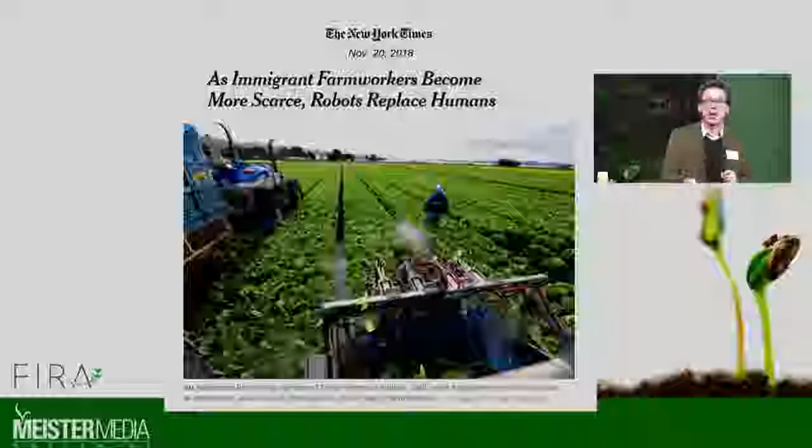Now, as you've been hearing, this is happening in the United States as well. And in fact, it's even happening in Mexico, which is where the United States has long drawn its labor from.

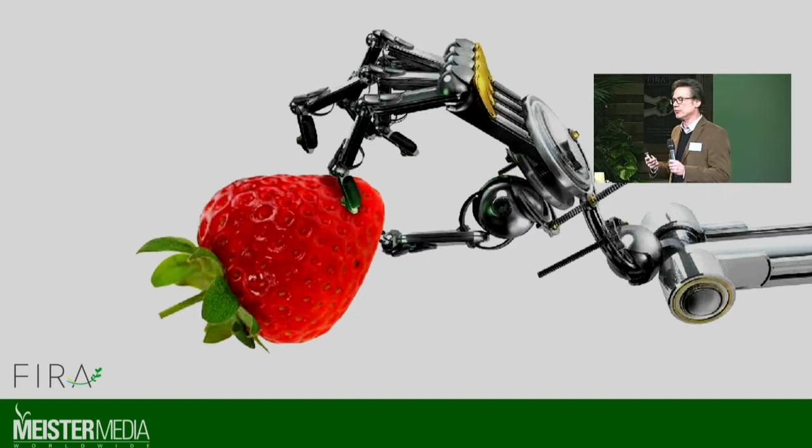I just thought it was interesting to round out my opening comments. This, I think, is the perception of robotics - just a robotic arm that's going to replace human beings. There's always been this dystopian view of robotics, when in actuality we know there's a wide range, as Mark Van Ocht was saying earlier, of sizes and types of robotics.

So it's exciting to see all these coming to fruition now in greenhouses, vineyards, and vegetable operations. It's really exciting to hear at this conference all the technology that's now actually coming to fruition. So those are just some opening comments from my perspective, from serving agriculture as I have for about 31 years at Meister Media.

And now I'd like to begin our panel discussion, which will round out this second session, called the Robotic Revolution. This is truly an international panel.

We have Dr. Noboru Noguchi from Hokkaido University in Japan. He will be followed by Salah Sukkarieh of University of Sydney in Australia, who's not able to be here - however, he will be joining us via video, and I think it's late evening now in Australia. So it's wonderful that he can join us for questions. And then we'll round out here from Bosch Deepfield Robotics in Germany, from Maurice Gohlke.

First I'd like to bring up Dr. Noboru Noguchi - he'll tell you more about himself, but as background, he's professor of agricultural robotics at Hokkaido University in Japan. He's professor and director of the Robot Vehicle Lab there. Since 1990, his laboratory has developed more than 15 agricultural robotics. Noguchi has received more than 20 academic awards from major corporations and academic institutions in Japan and internationally. Currently he's working on a multi-robotic system and the intelligent vision of machines for a mobile agricultural robot.

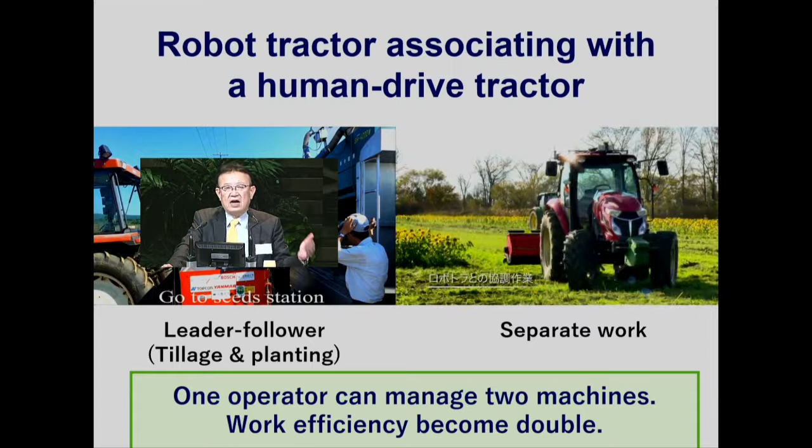The human tractor in this case is tilling, subsoiling by driving the tractor. But this one guy is also responsible for ensuring safe operation of the robot. So obviously, one operator can manage 2 machines. Work efficiency becomes double. This is the current technology using robot tractors in Japan.

Next step is, again, remote monitoring, remote control systems. The goal is to complete this by the 2020s. The goal of this system is to implement super labor-saving technologies into agricultural sectors.

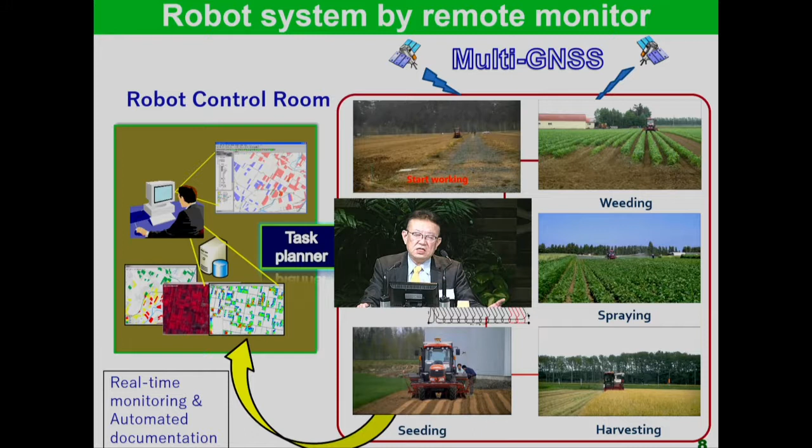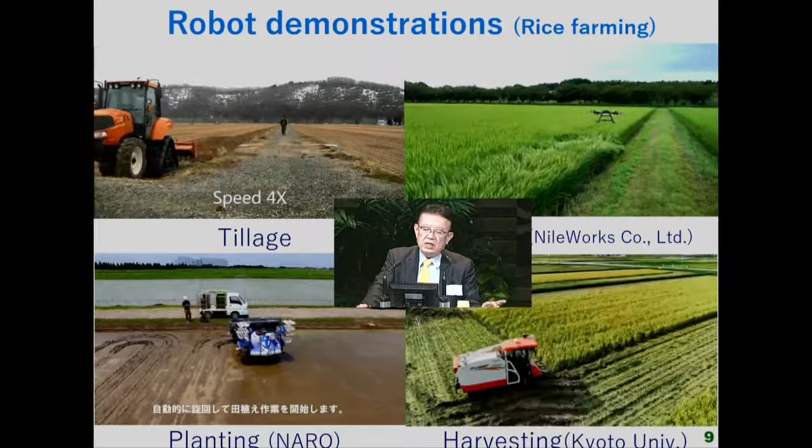So this is our achievement for agricultural robots. Here is rice plant farming: tillage, spraying using drones, planting, harvesting by combine harvesters. Planting is being developed by NARO.

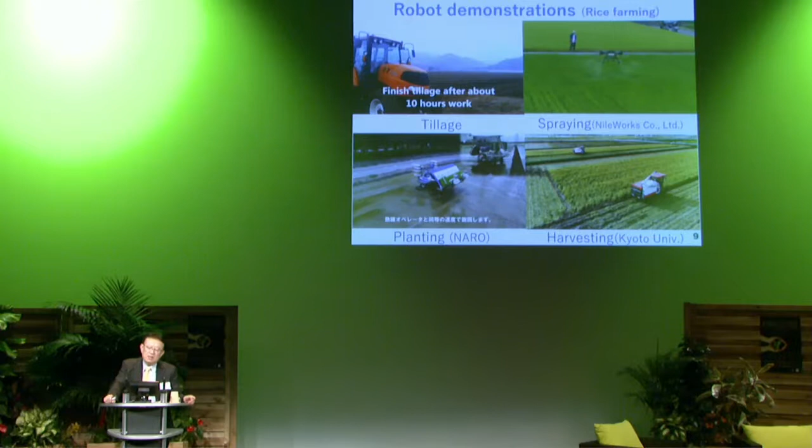This is the National Research Institute of Japan. And the harvesting robot is being developed by Kyoto University. But these are basically almost the same accuracy, less than 5 centimeter errors.

The other thing is upland farming. This is Hokkaido University's work. Fertilizing, seeding is possible, and weeding and spraying are also possible.

Okay, this is not yet available; there are no companies selling this kind of robot system for weeding, spraying, without any damage to the crops, because of the high accuracy required. Another thing is that this robot can go to the field by itself.

Therefore, it's not necessary to bring the robot tractor to the farm. The robot tractor goes to the field by itself, works there, completes it, and comes back. This is possible. But unfortunately, the current public road traffic law, which is very important in Japan,

doesn't allow us to use a robot like this. We cannot run, an unmanned tractor cannot run on the public road. This is the regulation. But the technology is available.

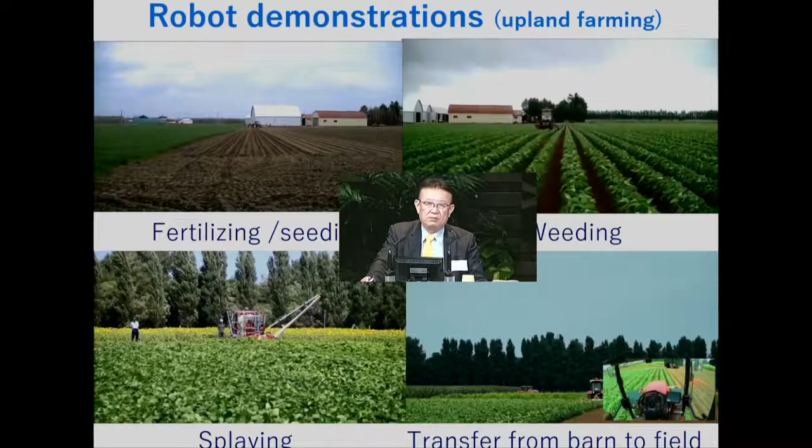But the important thing is safety. Absolutely, definitely. So many companies are now developing very good sensors, and our laboratory is also developing safe devices, safety sensors.

We are developing using omnidirectional cameras, mounted on top of the roof. We construct stereo vision on the omnidirectional cameras, which can cover 360 degrees. We are also developing laser scanners, mounted front and rear, covering 360 degrees surrounding the robot. Each laser scanner covers 270 degrees, but using 2 laser scanners, we can cover the whole area.

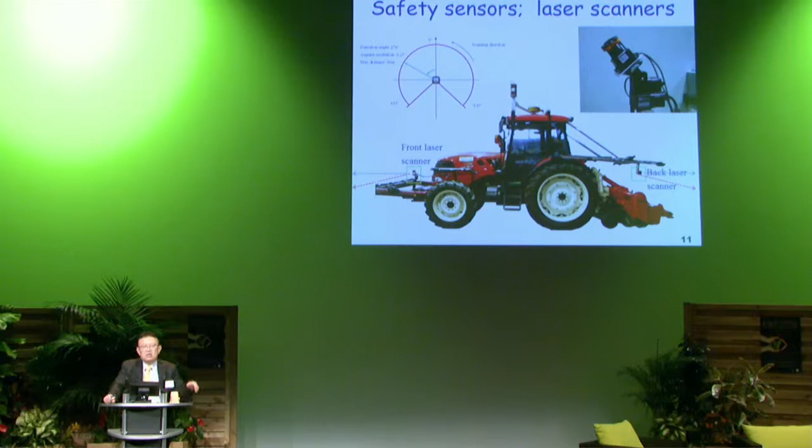We also move it back and forth to detect in 3D. So this is a demonstration, it's weeding, the robot is weeding. You can see someone get in front of the vehicle, it stops and then makes a run, even in the lateral directions, recognized by the sensors, and the rear too.

We are also shifting up and down. Therefore, small kids and small animals can be detected, but if a person is completely hidden by crops, it's very difficult, almost impossible to find them. But if you can see the human clearly, it's very easy to find out and then stop it and make an alarm.

We are now also developing remote monitoring systems. We set up 2 monitors: one is a live image around the robot, using web cameras from front, backward, right, and left, 4 cameras total. The other monitor is a GIS-based monitor.

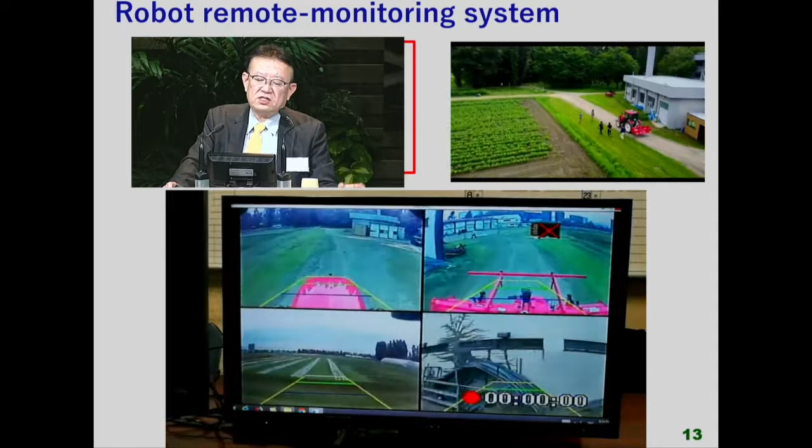So you can see the robot tractor go out from the barn to the field, and the live images are sent to the offices, where we can see the surrounding situation and the condition of the robot. The other monitor tells us the current status and where the robot is, based on the GIS.

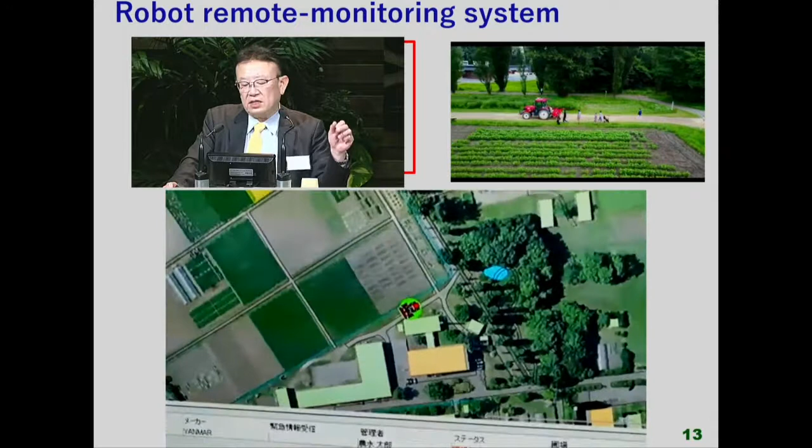If some problem happens, we can immediately stop it, and we can also restart again. So you can see the robot is moving, and we can recognize the robot working there.

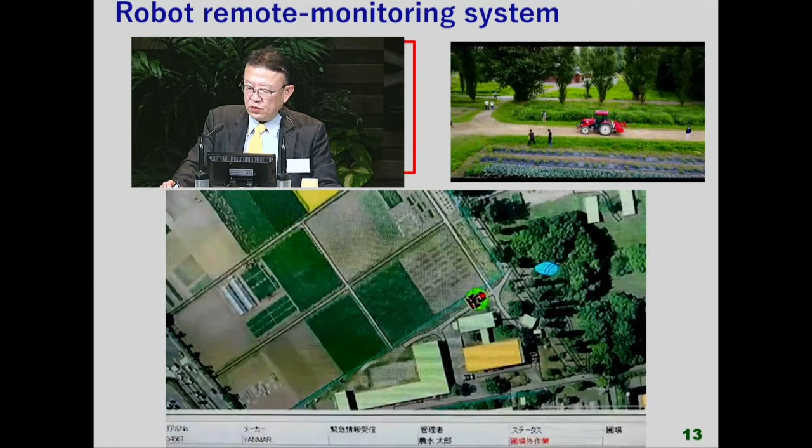Another application we are developing is multi-robot tractors. As you know, Japan is a very tiny country. In the main island, each field is very small, normally about 100 meters by 30 meters. This is a common size. Farmers use small tractors, about 50 horsepower.

I come from Hokkaido, which is a little different. Our acreage is almost the same as the German size, about 50 hectares. Therefore, farmers in Hokkaido use big tractors. But now we are thinking of a new concept of robot tractors: we want to try to use the same size of tractors, from small fields to large-scale fields.

For instance, in multi-small farmland, each field is small, and a 50 horsepower robot tractor works separately. On the other hand, in a large farm field, people usually use big tractors instead of small ones for efficiency. But we try to use small tractors with multiple robots instead.

This is comprised of small robots, and small size machines are good for both safety and soil compaction. We don't expect each farmer to have multiple small robot tractors. Our idea is that farmers borrow small robot tractors from each other, making flexible and efficient work possible. A robot tractor is available 24 hours, so sharing with each other should be possible, I believe.

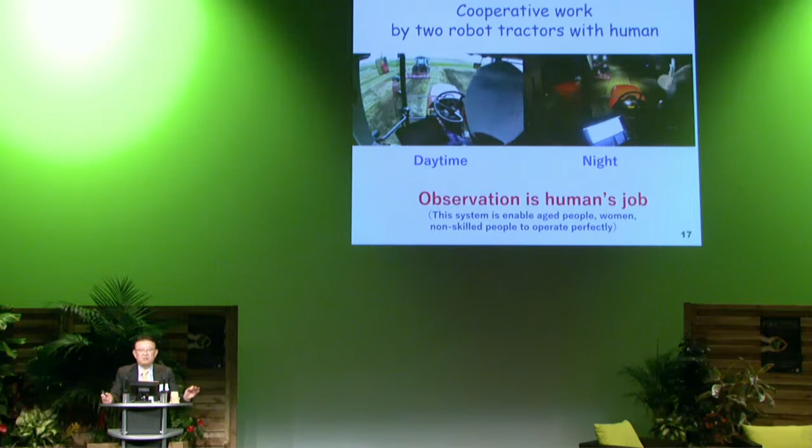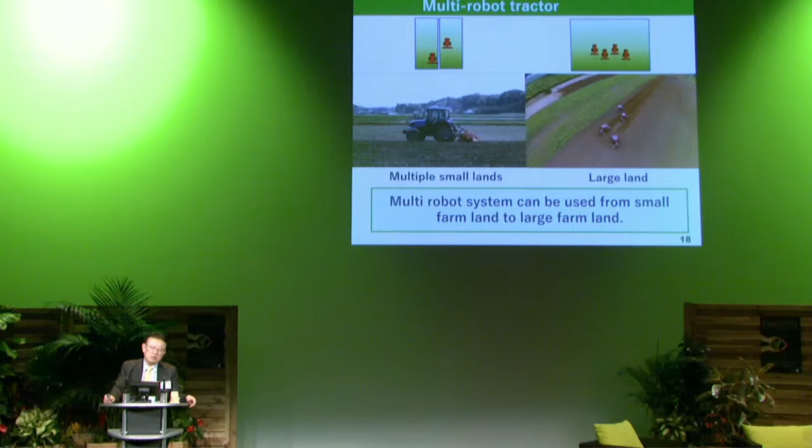We are now developing small robot tractors and multiple robot systems. You can see the left hand is multiple small lands. We tested this near Tokyo downtown in a small field. Each robot tractor works separately, individually. The other one is in Hokkaido, our field, where 4 robot tractors work together. These 2, the Honshu Island robot tractors and our robot tractors, are the same size, about 50 horsepower. But for the 4 robot multiple robot system, the total power is equivalent to 200 horsepower because 4 machines work together. Multi-robot systems can be used for small farmland to large farmland. This is the idea.

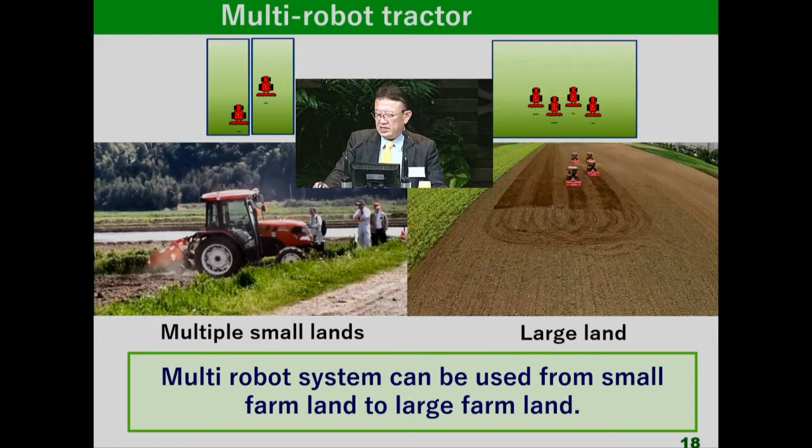So now here, you can see the robot tractor is not individual. We can communicate with each other to make safe operations. So, formation. Now, this is our Prime Minister, who introduced our technology last year.

Prime Minister Abe introduced our technology at the 14th annual meeting of the STS Forum. STS Forum is the Science and Technology in Society forum. It is always held in Kyoto city. Last year he introduced our technology. Please take a look.

Five years in a row, I have joined your annual meetings, and each time I've emerged even more optimistic about our future. I am a big believer in what science and technology can do to solve some of the structural problems we face. We must advance and benefit from science and technology. It is as simple as that.

Take, for example, agriculture. In my country, farmers are aging, and their numbers are declining. But let's look at the positive side. One good example is robotics and what it can achieve. This August, on the farm in Hokkaido, there are 4 tractors running shoulder to shoulder.

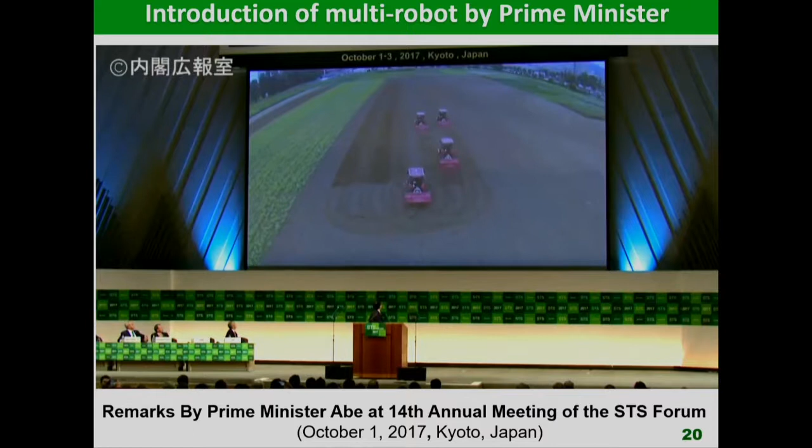So this is our robotics. 4 robots work together, communicating with each other. How about that?

Robot tractors could work rain or shine, day and night, even while the owner sleeps. And that is just one small piece of evidence that technology could make our agriculture all the more promising. You need not worry about farmers again, no more.

This is, he's a very good sales manager. But anyway, now he mentions the Japanese GPS. We are using Japanese GPS as well. We call it Michibiki, the Quasi-Zenith Satellite System.

Current GNSS cannot be used at any time, in any place in Japan, at least. Sometimes it drops to float solutions, and sometimes differential GPS solutions. That means the farmer needs to operate it by himself. Therefore, there is low reliability due to the limited number of satellite vehicles, and also acquisition of signals for RTK has problems.

QZSS, Michibiki, has been started since November 1st this year to develop satellite positioning services that can be used in a stable way in all locations at all times. This system is compatible with GPS satellites and also Galileo, and can be utilized with them in an integrated fashion. In this way, the satellite positioning services environment will be advanced dramatically. Michibiki QZSS can be used even in the Asian Oceania region with longitudes close to Japan, so its usage will be expanded to other countries in these regions as well.

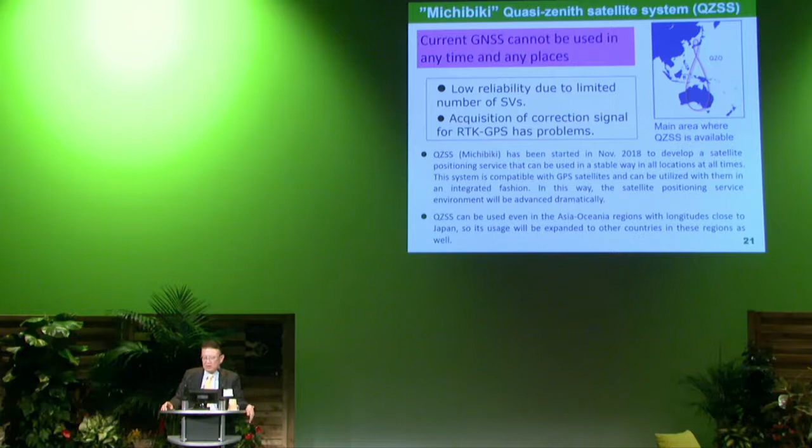You can see the map there. This is QZSS coverage of these areas. Therefore, Australia, China, Indonesia, Philippines, Malaysia, Thailand are covered. The service is available. You can see the figure 8 is the orbit of the QZSS. So now this service started this November 1st this year. This is also a good introduction into our Michibiki. Please take a look.

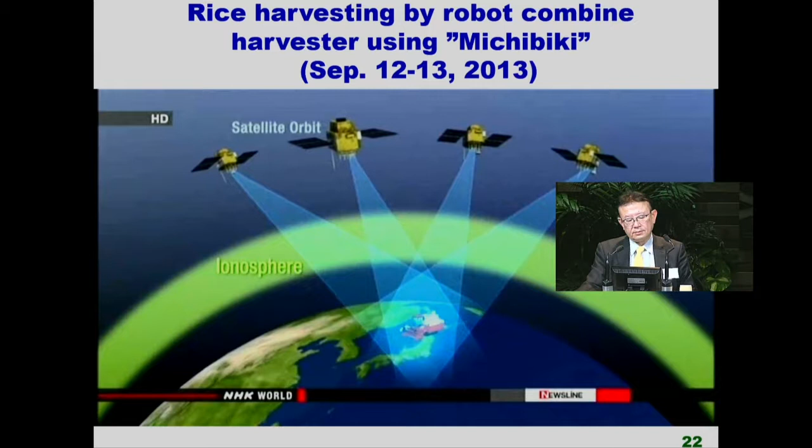Most countries rely on the Global Positioning System, or GPS. But some factors cause GPS data to lose its accuracy on its journey to ground receivers. Two of these are the shift of the satellites out of their orbits and a delay in the signal caused by the ionosphere. They can be off by as much as 10 meters. The Michibiki system sends correction data and reduces the error to centimeters.

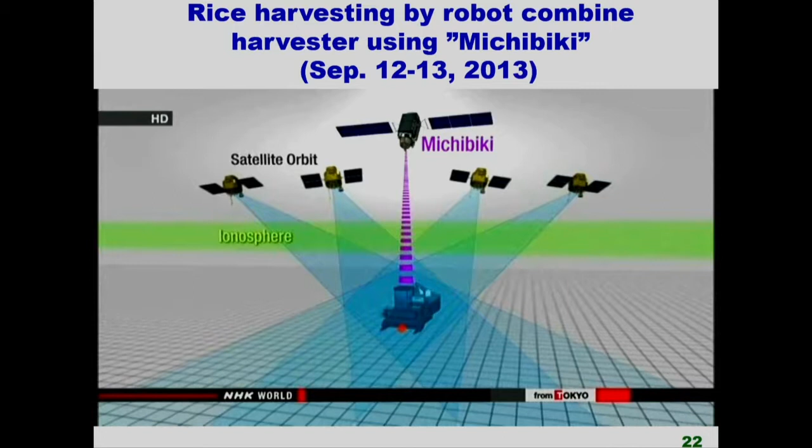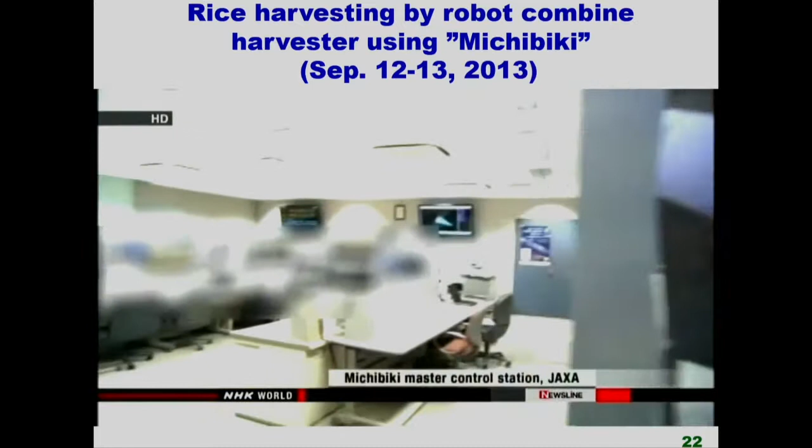The Michibiki system achieved positioning at this level of accuracy. The key was producing the most accurate correction data possible. This is the heart of the system at the Japan Aerospace Exploration Agency. Correction data is being collected and sent to the Michibiki satellite. A unique algorithm is used to calculate factors that influence GPS accuracy, and data is then produced to decrease the positioning errors.

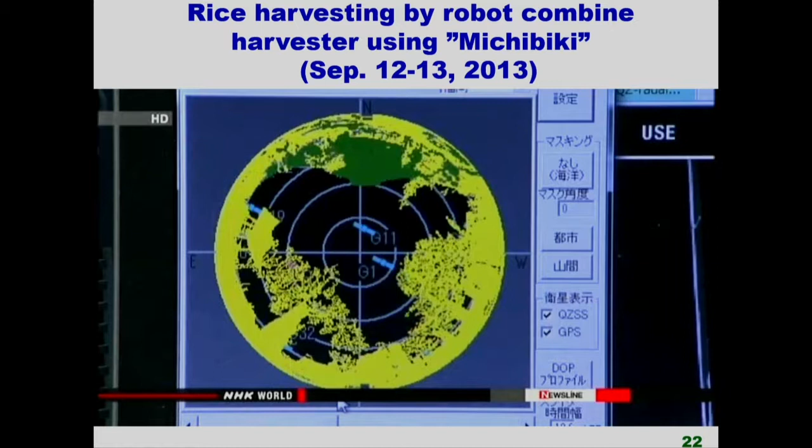Improved accuracy creates new opportunities. One example is using robots for agricultural work. A group led by Hokkaido University professor Noboru Noguchi aims to become the world's first team to completely automate farming.

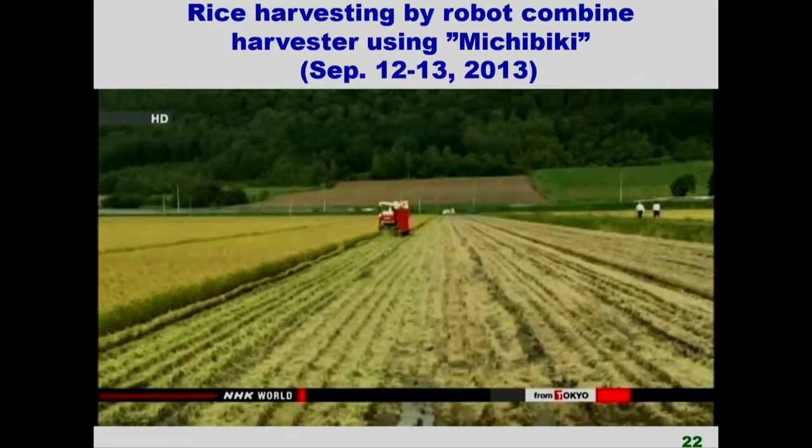GPS systems for farming are already used in places such as North America and Europe. Unlike this harvester with the Michibiki system, a driver has to be in the vehicle with the current system for safety and to turn the machine. The accuracy of the Michibiki system allows the vehicle to make turns by itself.

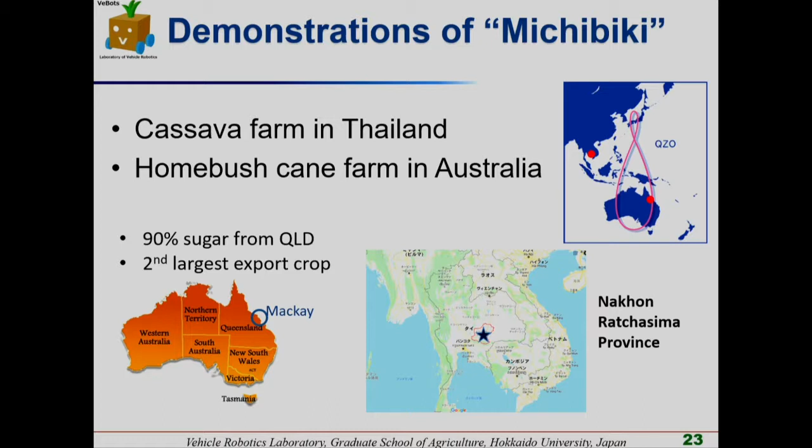This one already started in 2013. I mentioned that this year the service started, so 5 years ago we worked with the government. Therefore, we used Michibiki during their development, and we tested using robot combine harvesters with Michibiki.

But now this service is completely started, and all people can use these systems. We also did performance demonstrations with Michibiki in other countries - one in Thailand and the other in Australia, since Michibiki covers both Thailand and Australia.

Thailand also has challenges with labor shortages - for example, cassava planting. Normally two people are needed, the operator plus workers, but with no operators needed, one person can just plant the cassavas alone. No drivers - we demonstrated that in Thailand last year using Michibiki.

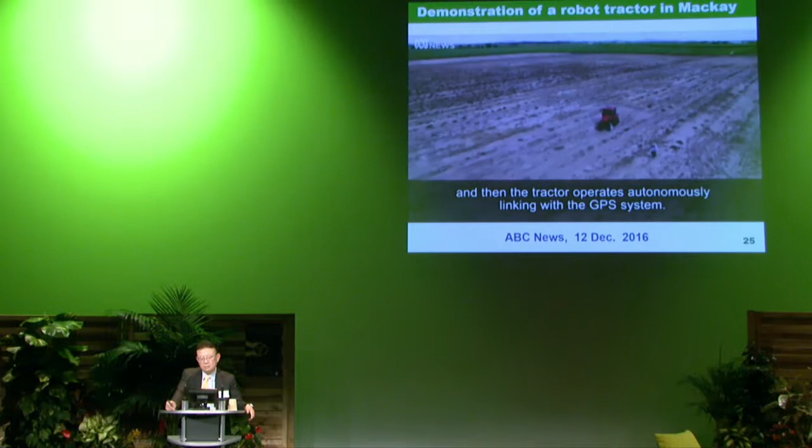The farmer could go to bed at 8 o'clock. That tractor could go round and round the field all night, come out, fuel it up the next morning, the job's done.

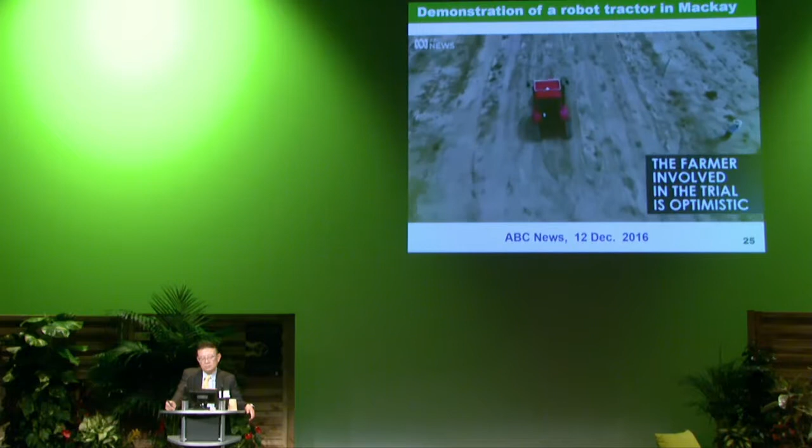If we can achieve more productivity with less stress and less people, I suppose it's going to be a good thing. So this is also something we tested 2 years ago, and Australia is also very much interested in this kind of technology.

We also tested drones, monitoring the sugarcane growth, height, and also the NDVI, which is the health of the sugarcane. We attach RGB cameras and radars underneath the drones, then fly over there and make a map. The positioning uses the Michibiki QZSS.

Harvesting heavy crop is very laborious for farmers. The harvesting robot is able to perform selective harvesting without giving any damage to the crops. Target crops are pumpkins, watermelon, cabbage, and so on.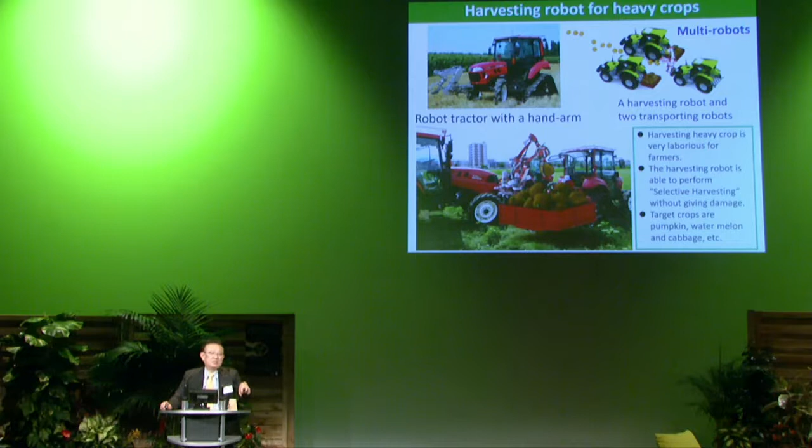Multiple robots are used, two robots. In the front there is a container, and the center robot has a hand that harvests pumpkins and loads them into the container. This is tested in the laboratories. This is our goal.

Now we are developing another robot, a smart farm robot. Actually, current technology robots can only achieve simple tasks, just running precisely, but they don't have any intelligence at all.

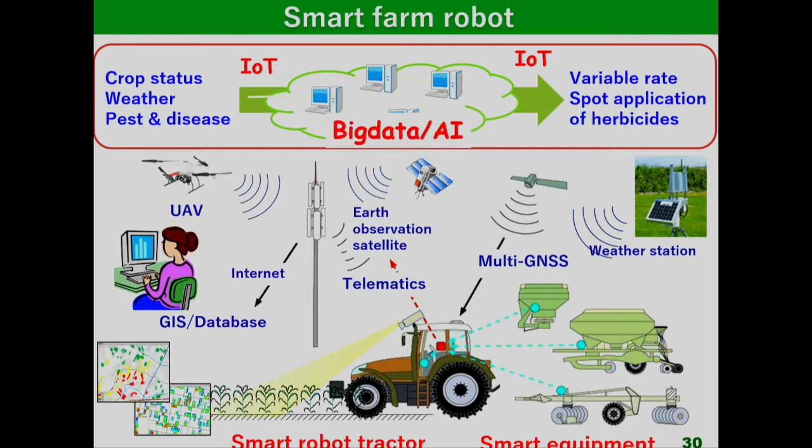Therefore, we want to add intelligence to the robot tractors, detecting disease, the affection of wet soil conditions, and also the lack of nitrogen. But putting intelligence in the robot is not a good solution, I believe, because it's very costly and the robot becomes expensive.

Therefore, now we place the intelligence outside the robot. Crop status, weather, pest diseases are detected by drones or whatever, and through IoT, uploaded to servers, where AI analyzes the data and the final result is sent to the robot. The robot follows that decision. This is the idea, so IoT, big data, and AI are key technologies for making an intelligent robot.

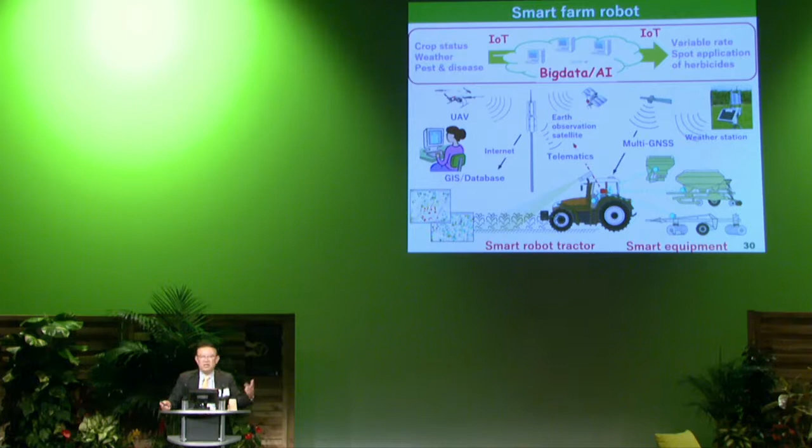This is what I'm developing. Finally, I will show something fun using a robot. This is two robot tractors working together, drawing pictures and writing text.

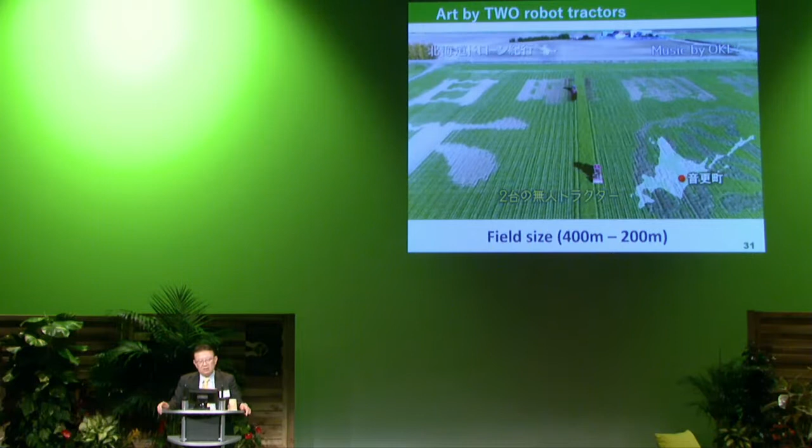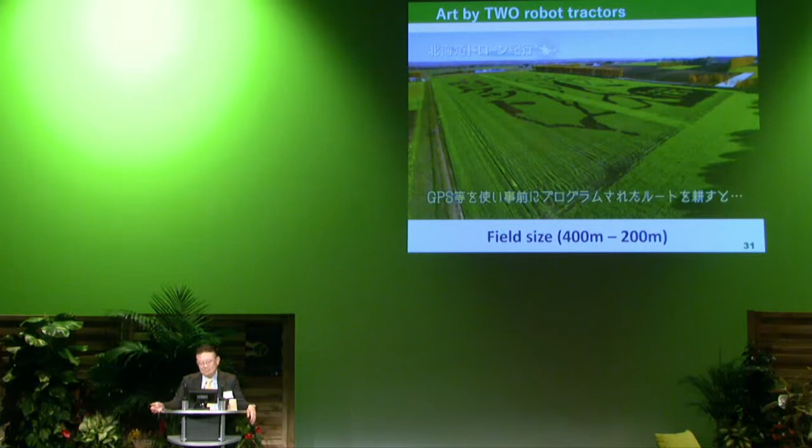This field size is 400 meters by 200 meters. Two robot tractors work together for 12 hours, going down with tillage implements and doing tillage up and down, which makes drawings or pictures, taking 12 hours, even through the night.

You can see these are Japanese characters. Now in Japan, a drama dealing with autonomous vehicles and robot tractors is broadcast, and this is advertising for that drama. This person is the lead of the drama, and these characters are the drama's title. It took 12 hours to make this, but anyway, this is what the robot can do.

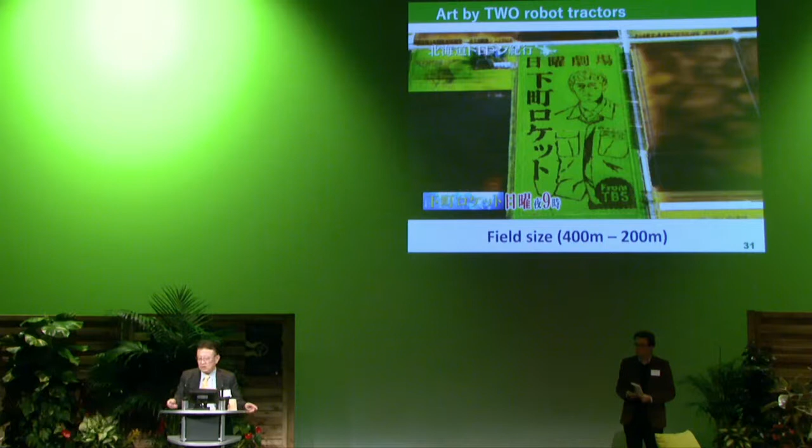Let me summarize. The Japan government has been emphasizing development of smart agriculture technology to solve the problems of Japanese agriculture. It is expected that agriculture robots will solve the labor shortage in Japanese agriculture. A robot tractor demonstration using QZSS Michibiki was performed in Thailand and Australia. Smart robots are essential for the next generation of agriculture, I believe. Thank you for listening.

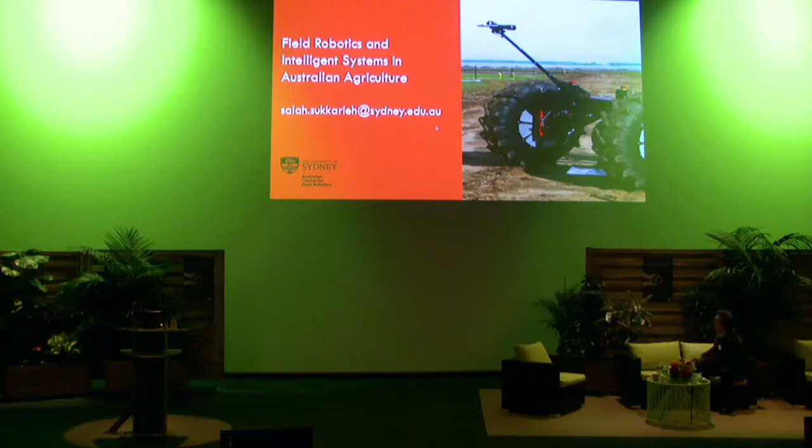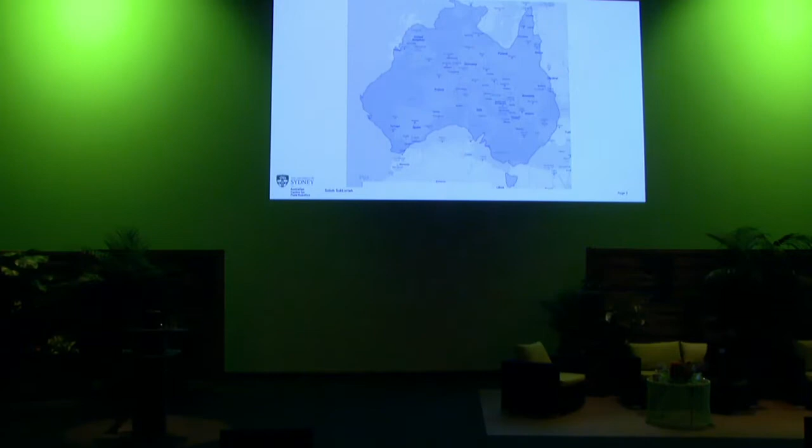For a little bit of background into who we are and what we do, Australia is a very large place. If you compare it, this is the true size of Australia relative to Europe, so it gives you some context of the size of the country. But there's only 24 to 25 million people, and most of them live around the east coast of Australia. So the population is probably the size of London or Paris, but it has the same land size as that of Europe.

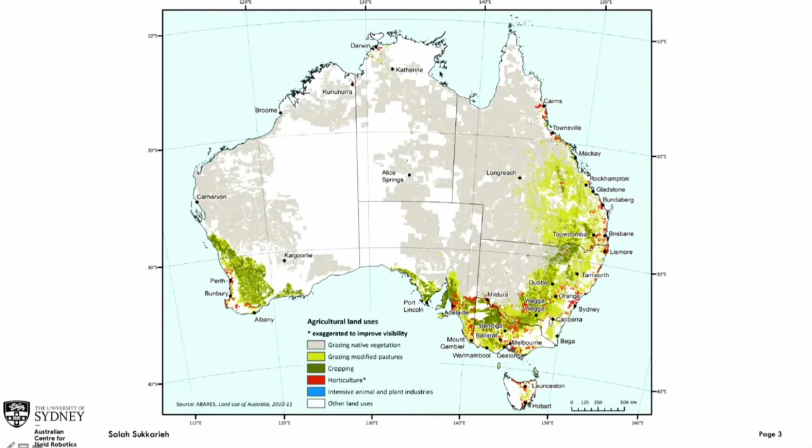If you look at the agriculture of Australia and what it comprises of, you'll see that we have quite a large variety of activity going on. In particular, you can see the green areas here, which represent dairy as well as a lot of horticulture work, in that space there. The light grey represents the beef industry, which is probably one of our largest exporting items. The dark green also represents wheat, for example, a lot of the cropping activity happening. So it gives you some perspective of where the agriculture is and what it looks like. It pretty much branches all around Australia, except for the really extreme climates, the desert regions, as well as the extreme north where the tropical rainforest areas are.

If you look at the export activity Australia goes through, you can see a breakdown of some of the main activities: meat and live animals, which is one of the biggest areas we export, as well as grains and oilseeds from the cropping activity. There's also a fair bit of horticulture and dairy products. So it gives you a perspective of the area and the activity space. What's important is that out of all the production we go through, almost 80% of it is exported.

So we can feed the population here, and then 80% of the produce gets exported around the world. And if you look at the size of the average Australian farm, it's probably the largest per hectare in terms of average farm sizes, even bigger than what you might find in North or South America. That talks to the population versus land size ratio.

The Australian population density is about 2 people per square kilometre. So hopefully that gives you a bit of an overview of what Australian agriculture is like.

But Australian farmers face pretty much the same challenges as any farmers anywhere around the world. We have an ageing farmer population, no real succession plan, and most kids go off to the city and don't come back. There's low labour availability, and we probably have the highest labour costs and highest minimum wage level in the world. So we have very high labour costs with large area sizes and low labour availability, which is quite a significant undertaking for agriculture when it comes to labour.

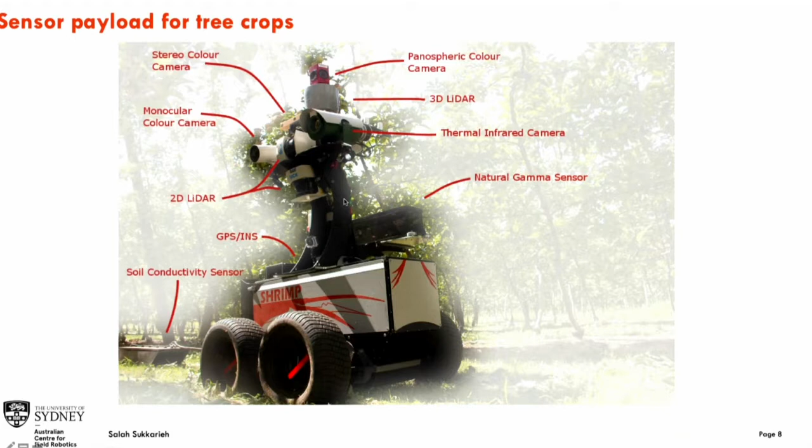This is a typical process we go through in real time. The laser unit, along with some algorithms, is able to detect individual trees as well as what's going on underneath in the soil, so we can measure soil properties and parameters. When you couple that with vision data and other sensory data, you start to be able to identify individual features within the tree, such as individual flowers and individual fruit.

As an example, this is a mango plantation. Using SLAM algorithms - simultaneous localization and mapping - as well as laser data, we can identify each individual fruit as we go through, and based on the volume size of the individual tree, we can estimate how much fruit there might be. Comparing this across different tree types - almonds, mangoes, bananas, avocados - we get very good accuracy, almost above 95%. So that was an example in tree crops.

The other example I want to show is in row crops, particularly horticulture. This is a particular platform we built called RIPPA. The idea was to develop a solar electric robot that could operate 24 hours, 7 days a week, demonstrating the robot's capability as it goes. It has a number of sensors underneath that look down onto the crops, and as the robot goes up and down the rows, we can extract a number of pieces of information.

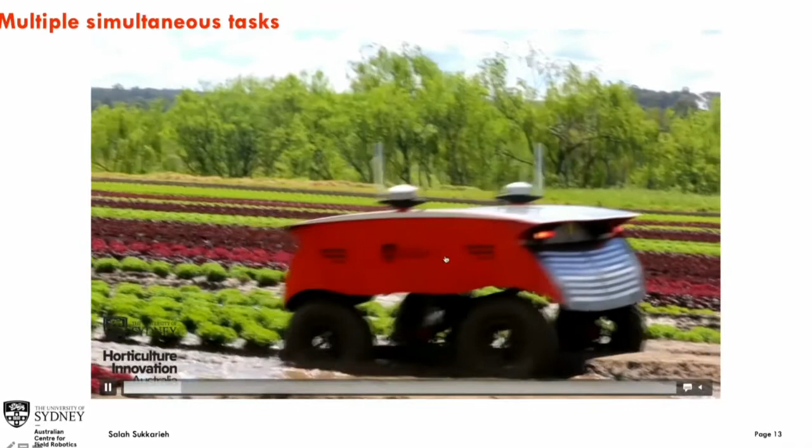You'll see now the collection of data it has gathered. As it comes up through here, we use machine learning techniques to detect individual plants and look at the size of the plant, and from that deduce crop health and vigor. This also looks at crop yield information, so you can envelop the plant with different types of models to understand crop yield.

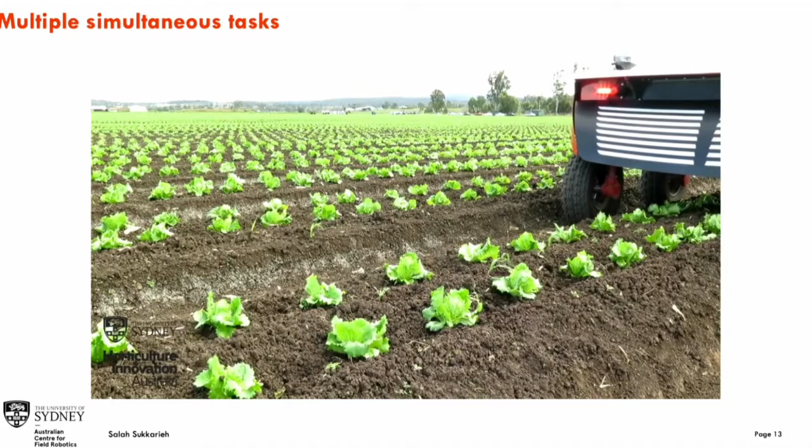If you can detect the plant, you can also detect the weed, and sometimes when the weeds are really small, you can come along and mechanically remove those weeds as you're going through.

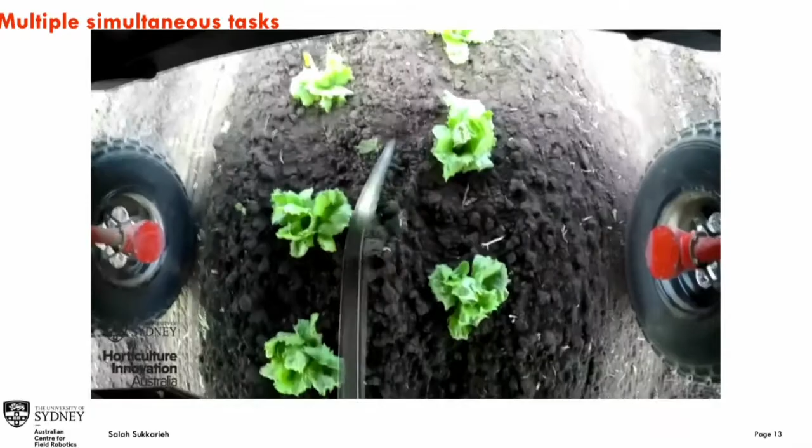So this is just showing you some of the activity. We can also identify each individual plant and target and spray plants. Here, on a cornfield, we're targeting each individual plant and spraying the right amount of fertilizer, for example, on each plant as we go through. So it gives us that capability.

And also we can do things such as measuring water conductivity. In this particular case, measuring water just next to a plant.

So what you have now is this robot that can operate 24 hours, 7 days a week. It can weed, it can spray, it can measure water, it can look at crop health and crop intelligence, and you start to build up all the data, and you can start to look at building up maps of information, crop health, crop status.

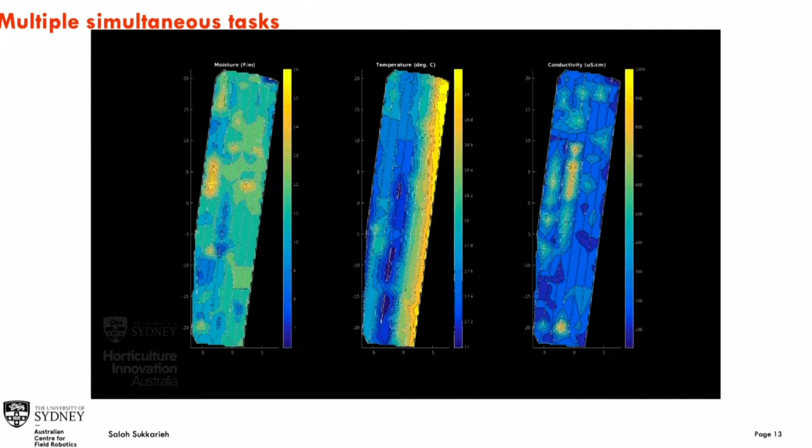Now, this is just us as roboticists coming along and building different tools, and from those tools being able to demonstrate different types of activity, and from there the farmers can deduce what's important, what's not important.

The other area that I wanted to talk about was grazing livestock, and as I mentioned before, it's quite an extensive industry.

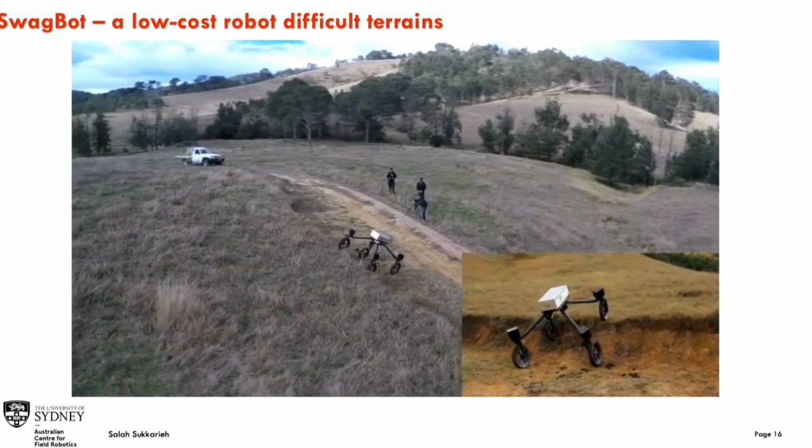This is one of our first demonstrations with a robot that could go through undulating terrain of different types, being able to go over logs and rocks, and this is all about looking at very difficult terrains.

This was one of our first implementations about herding, and we thought, how does a farmer move animals from one spot to another? So we looked at what would happen when the robot moved amongst the animal herd and how it would behave, and just tried to see what the animals would do.

As you can imagine, when the animals see this robot, they get a bit scared and want to move away from it. They don't quite like it, and it becomes very hard. If you wanted to move an animal from one location to another, it becomes very hard and difficult to do something like that.

They just go everywhere. But after a while, what we learned was that if we keep the robot with the farmer all the time, eventually the animals get used to the robot, and you don't actually need to push them anywhere. In fact, what you can do is just move them.

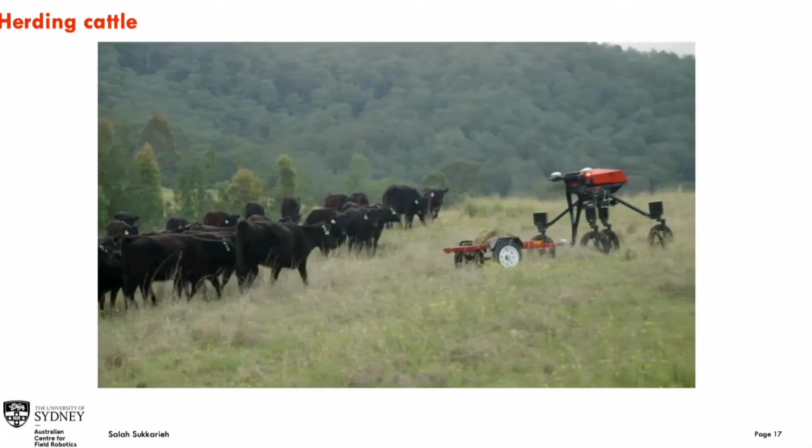And that becomes quite an important achievement, because now you can measure pasture quality, and with pasture quality you can move the animals from good pasture to better pasture and not have them overgraze.

And this is what you can do then, as the animals are moving around, you can start to detect what's going on with the animals and how they're moving. You can measure their position, their velocity, where they're grazing, where they're spending most of their time, and then you can start to look at animal-pasture relationships and even maybe animal health.

The other thing that's important in grazing livestock is also weeding. So this is the robot detecting weeds in real time, being able to determine where there's a weed and where there's native vegetation, and then it positions itself amongst the weeds, and it can come along and spray the weeds with the right amount of herbicide or pesticide at that point.

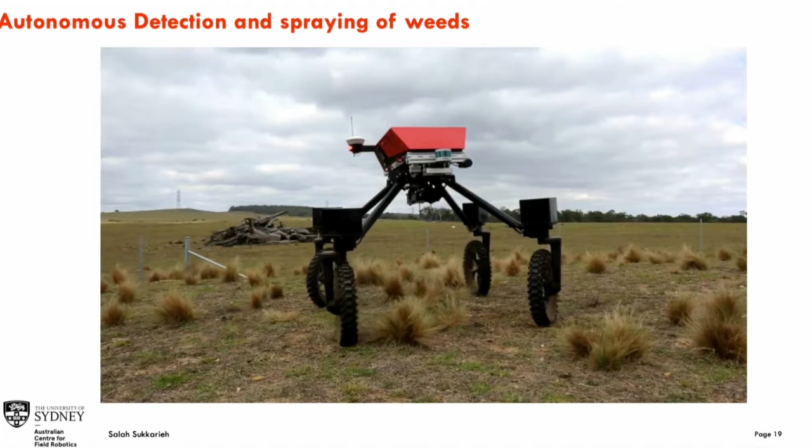So I was just showing you some different aspects around many of the different growers, but for most robotics it will happen for large scale farms. And what we've also tried to look at is what happens with smallholder farmers. Can we actually develop technologies at lower cost that will work for smallholder farmers?

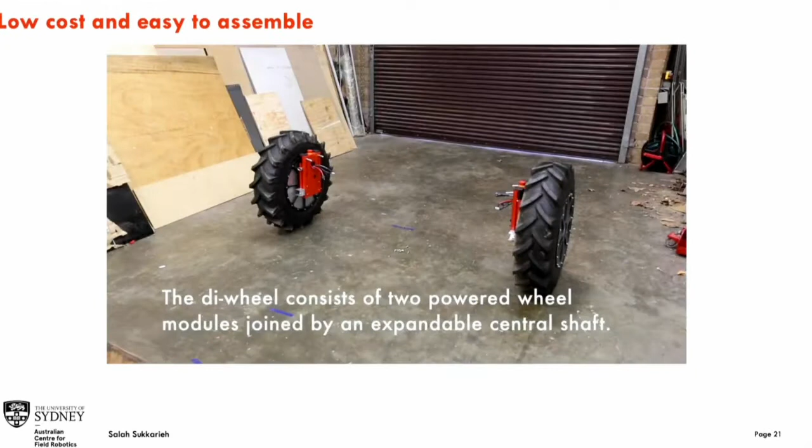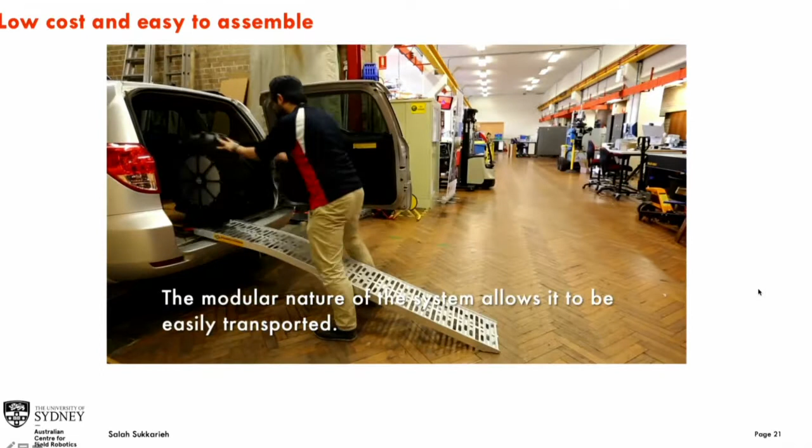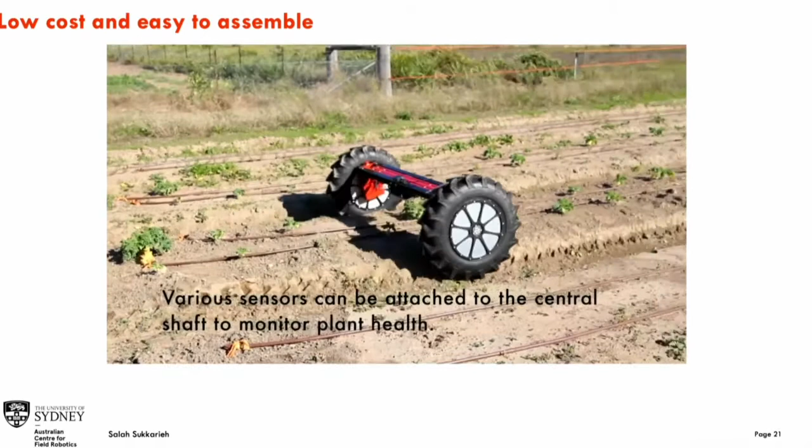So this is one of our first implementations where we designed a di-wheel, a two-wheeled platform that could be built up very easily, removed, and put into the back of a vehicle. You can see the sensor payload right in the middle there. You can move it from one farm to another and start to collect crop information from there. Even though it wobbles, all the software algorithms take care of it, and we can start to do crop intelligence from that.

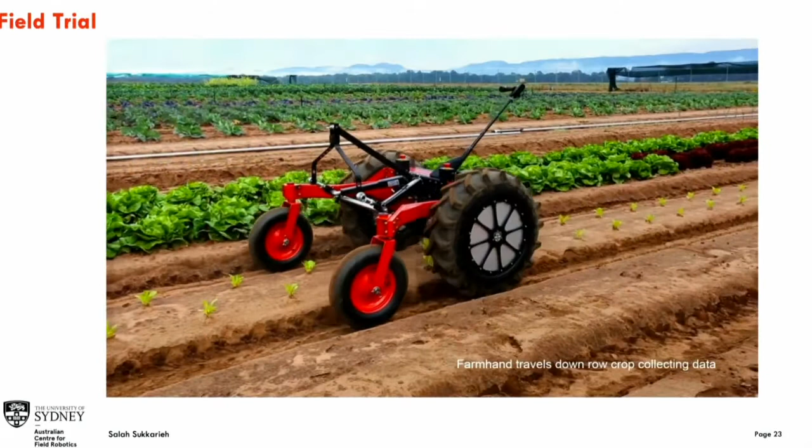We took it to a whole range of farmers and demonstrated different types of capabilities for it. So this is, for example, the robot going up and down the rows, and it can detect individual plants. From those individual plants we can then look at spraying individual plants, as well as different seeding technologies. So it gives us a capability that we can actually start to look at.

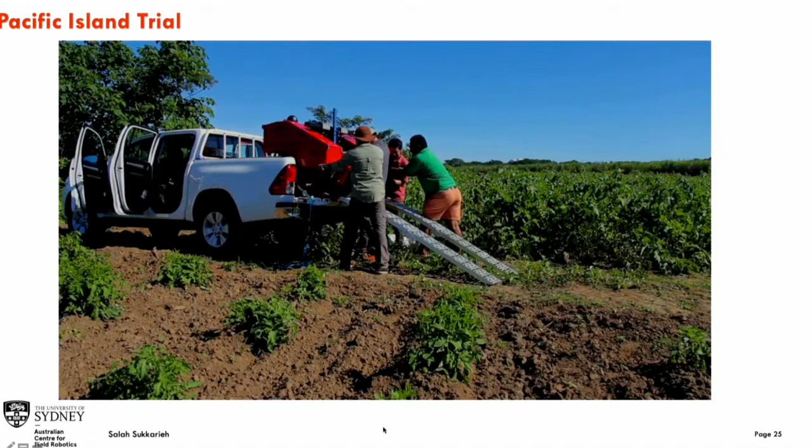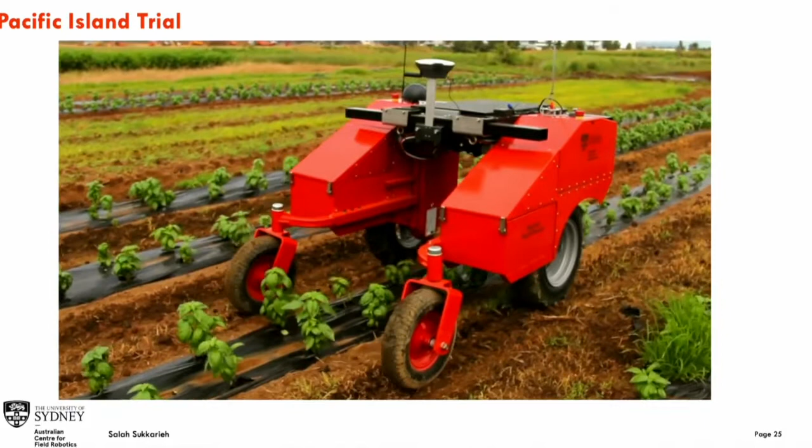We took that robot to Fiji, Samoa, and also to Indonesia. This was part of some trials funded by the Australian government looking at developing countries. It's the same type of robot, you don't need all these people, you can just winch the robot down as it's going through. We did the same thing, taking it to these different farms, demonstrating its capability to detect individual plants and also do things such as spraying and weeding technologies.

And what we found is, again, even going to developing countries, farmers there have the same constraints that farmers in Australia do, just at a lower cost margin. So being able to develop these technologies to work for this lower end becomes really important.

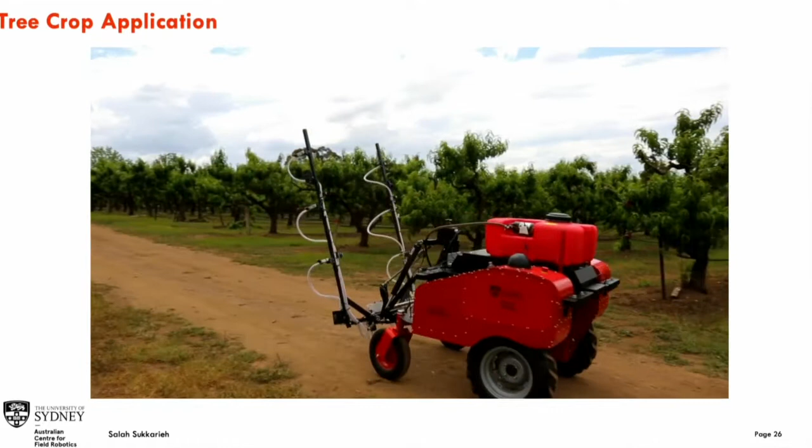A lot of tree crop activity happens in the Pacific Islands, so we also demonstrated how this robot could be used in a tree crop application using the same technologies. Here it is doing automated spraying along the tree row, detecting how to move along the row and doing so autonomously, as well as detecting individual fruit. This is a nectarine orchard. Being able to detect individual fruit becomes important, and being able to determine from there how much to spray and where to spray.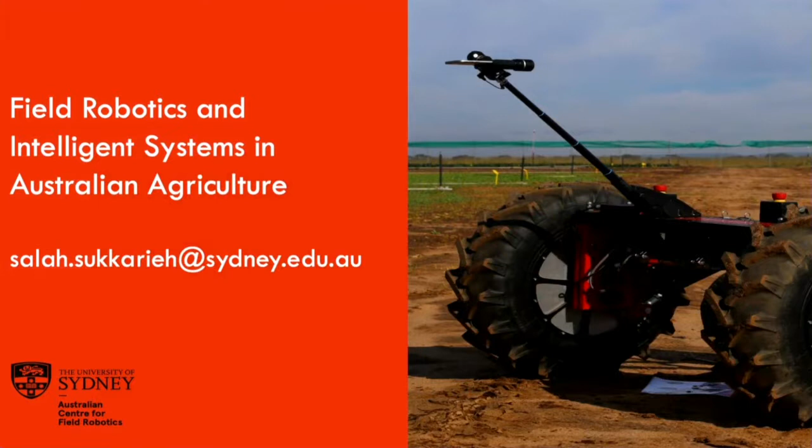So that gives you hopefully a rundown of where we are in Australia and the Australian context, and a perspective of the types of activities we're looking at. We have very, very large farms, as I mentioned earlier, and hence robotic systems for that, as well as for smallholder farmers. In a country like Australia, where a lot of it's exporting, the real benefit robotics will provide is the ability to increase yield, decrease variability, and deal with the large-scale export rates we go through.

So I thank you for your time, and I'm open for any questions.

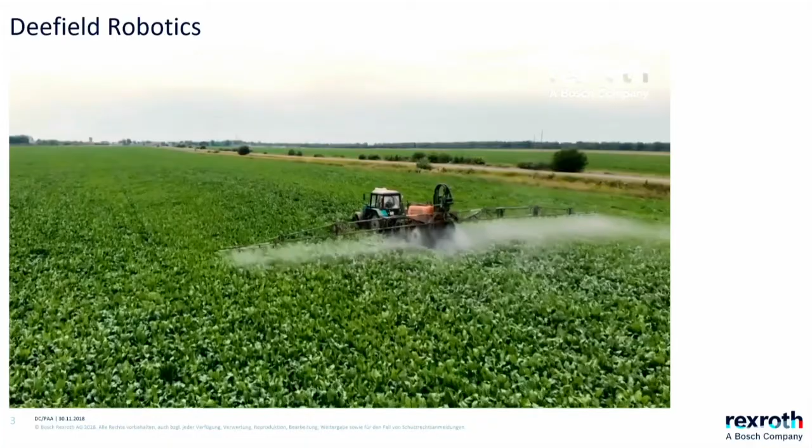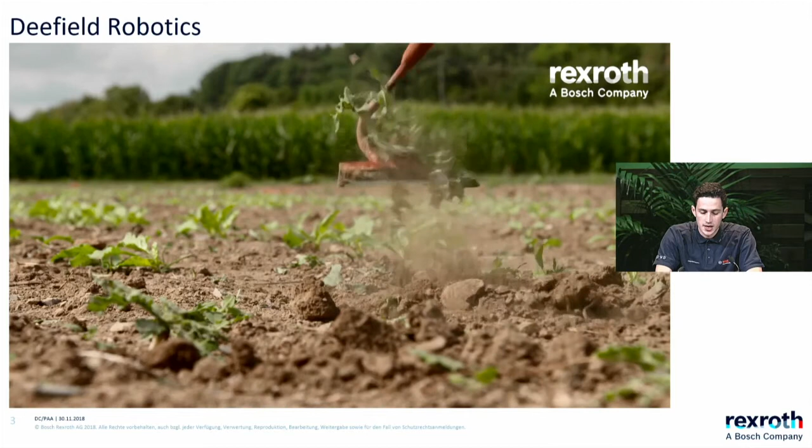Sugar beets, like other crops, need to be protected from weeds. The main method used is herbicides, which has a lot of restrictions, so there's a push to use less herbicides. A few farmers in sugar beets use a hoe to care about the weeds in the interrow. The actual method used a long time ago, and still used in organic farming for sugar beets, is basically manual hoeing.

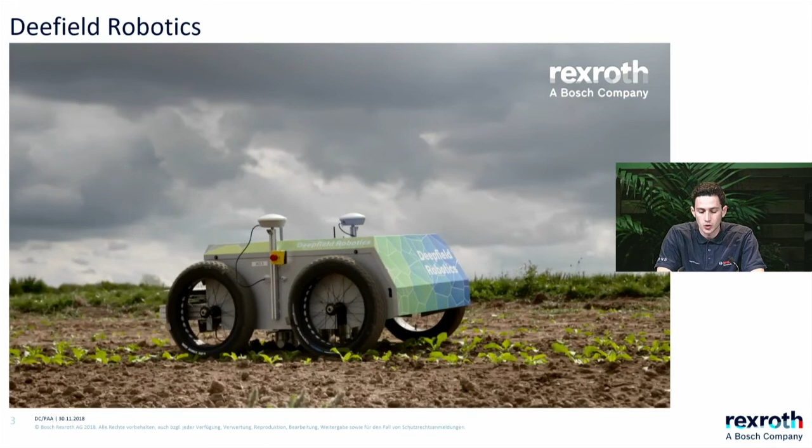So the question is, what if we did the same thing that the human does when he hoes the field manually, but with a robot?

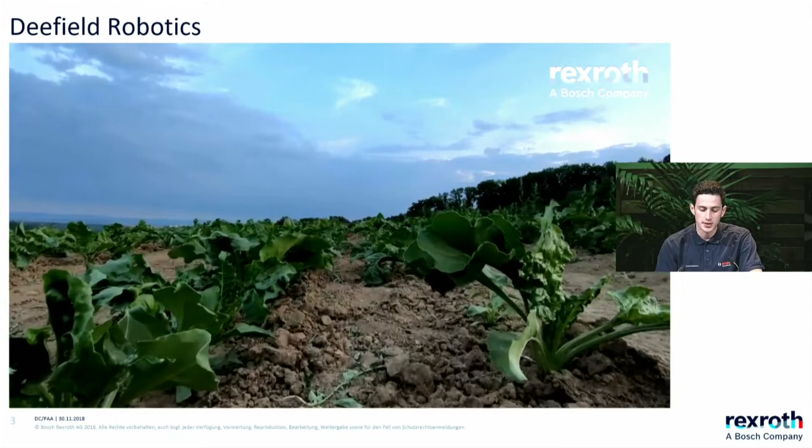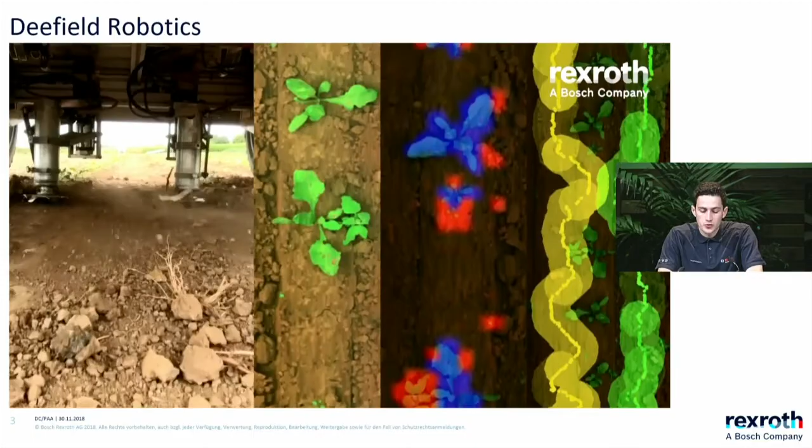Just like the human walks over the field, the robot is basically driving over the field. We use our eyes to see the plants, and this robot uses a camera system to see plants. We use our brain to classify between different types of plants and plan how to use our arms to kill the weeds, and we do this with artificial intelligence, deep neural nets. Then we have this chopper tool that moves towards the weeds and kills them by chopping them.

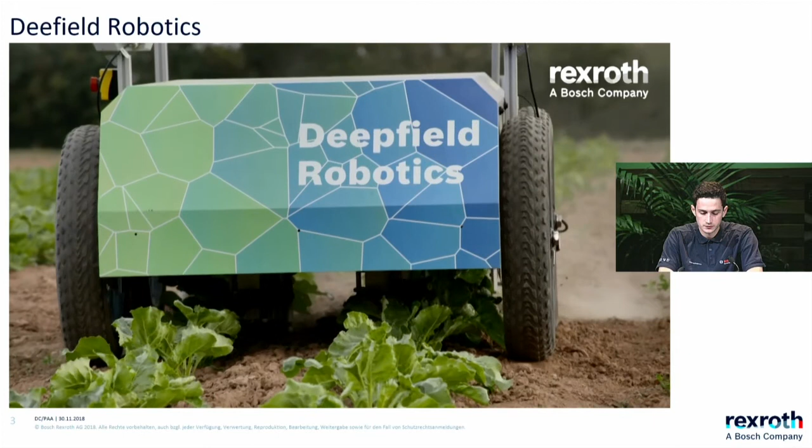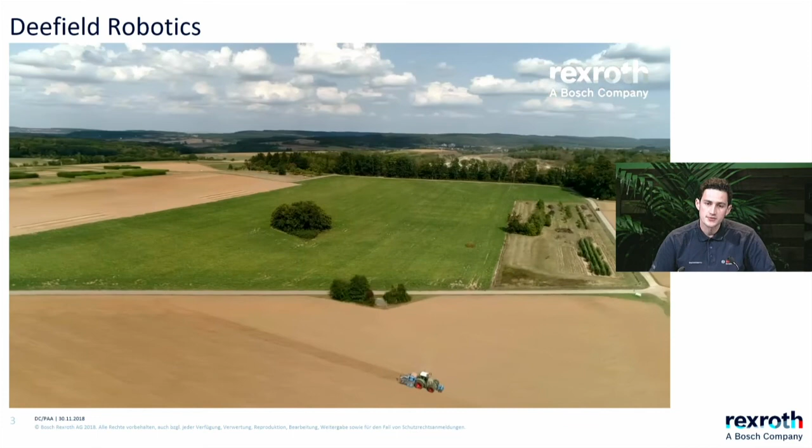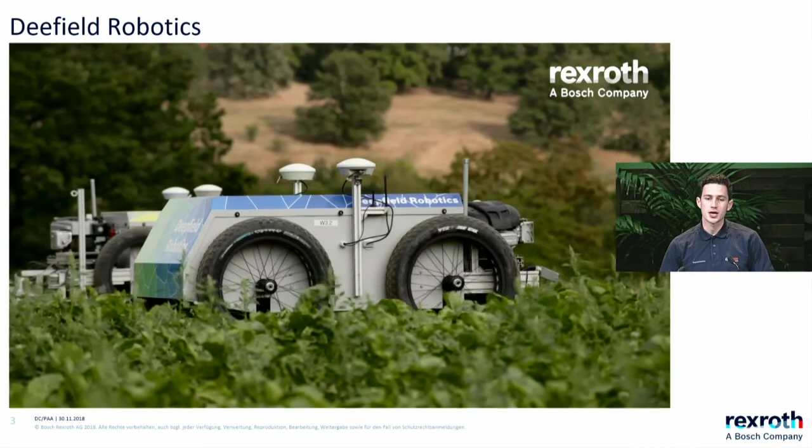So here you can see it driving during the day and into the night. Really the main thing that we have is this technology we've been focusing on, which can detect plants in different fields, different types of weeds. Our robot is really a platform that we use to apply our technology on the fields. You can see them working together.

So how does this work? Basically we have a camera system, a camera which is very close to the ground. This is very important if you want good resolution and all the details of the plants, so you can recognize small plants, like plants that are really the size of my fingernail.

Those plants you see in the image look very green, but that's not because our plants are that green in the fields. It's because we replace the green channel with a near-infrared channel. So we use a multispectral camera to get better images of plants and make a better classification. We also use an active lighting system, so we're independent of sunlight.

Then afterwards we use deep neural nets to do a classification of plants, and we do this on a pixel basis. So this is not big plant versus small plant, or taking blobs and classifying blobs — for each pixel we say what type of weed it is. And it's not only sugar beet versus weed, but different types of weeds.

And with this we can deal with overlapping plants. So if you have several types of weeds together, or weeds overlapping with sugar beets, we can still classify them.

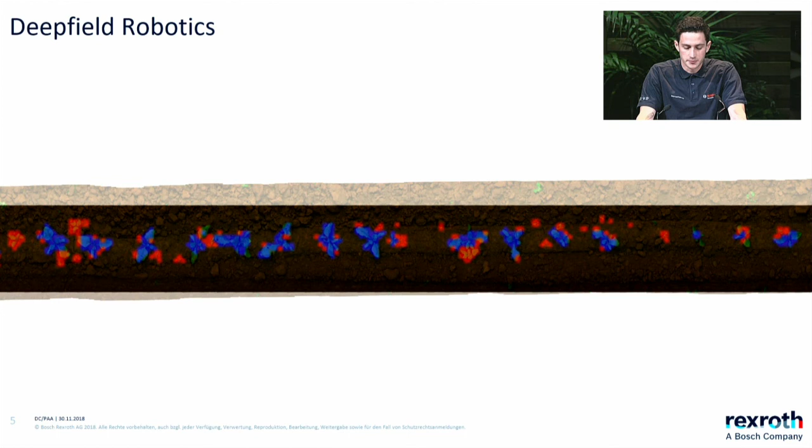Once you know which plant is the crop and which is the weed, you plan your tool so it reaches the weeds and spares the beets. For this we tried many different tools, though that's not actually the main thing we focus on — the main focus is really the recognition. But here we wanted to show one example of something that works well to kill weeds in the intra-row, very close to crop plants.

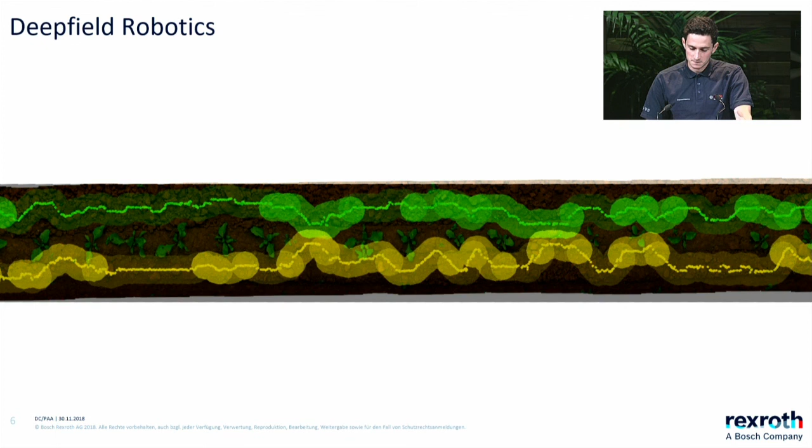As I've said several times, the real focus is the machine learning part, and for this you need a lot of data, very varied data. Just like a kid would learn to distinguish between different types of plants, we have to teach our classifier to distinguish between different types of weeds.

For this, over the last four years we've recorded a lot of data — data with different types of weeds on different fields. We have over 4.3 million labeled images. Plants also don't look the same at different times of day, so we have images taken at night, in the morning, at noon, and so on.

This is the technology we're using on the robot, but we see that for different types of fields, different use cases, different crops, you might need different types of tools. So what we're doing now is continuing to use our robots to treat our fields and enhance our technology, while also working with integrators.

Those integrators can use our system to do this plant classification, and then actually get this technology out — and that's what we really want — to get this technology to the farmers so they can do more modern weed control. This can be mechanical, but also chemical, with some savings in chemicals.